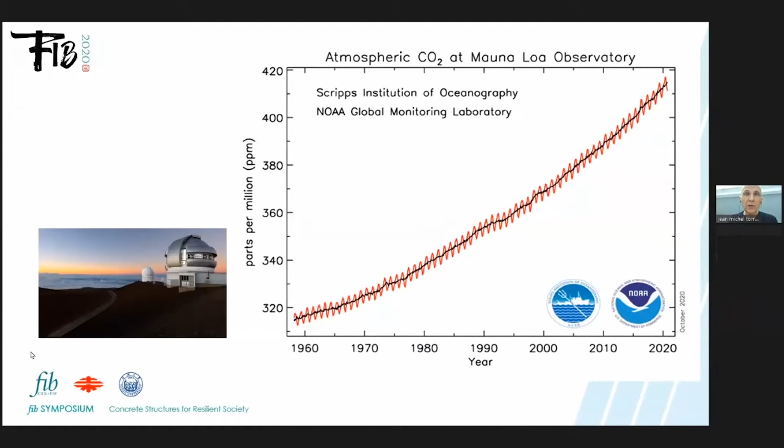And here I have the last measurement, and the effect of the COVID crisis is not visible on this curve, in fact. So it's an increase that will continue for several years. And the problem is that we have some effects on nature. Here I have chosen a first example, very important for the French people. It's the question of wine.

At the beginning of October this year in France and in Italy, there was the storm Alex. And for instance, in this little town in the Alps, there was more than 500 millimeters of rain in 24 hours. And it's a narrow valley, so that's why there was a lot of destruction in the valley. And the cost, we know, will be around 2 billion euros.

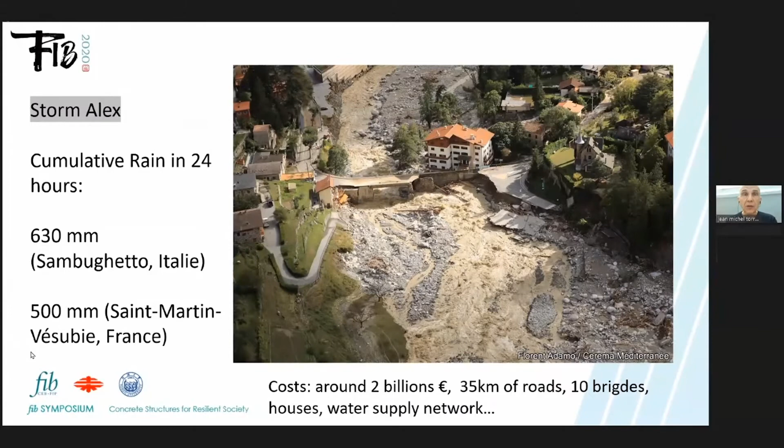A lot of roads were destroyed, bridges, houses, water supply network, etc. And of course, in France and in Italy, some people were killed also. Of course, it's not only in Europe. Actually, we have in Vietnam also large floods, with a lot of people dead and a lot of destruction also.

Here, this is a view in Hue, and you could see that we could not see the bridge. Normally, there is a bridge on the river, but it's under the water. And a new typhoon is coming actually in Vietnam. So we have a lot of accumulation, and we know that the increase in these events is due to climate change.

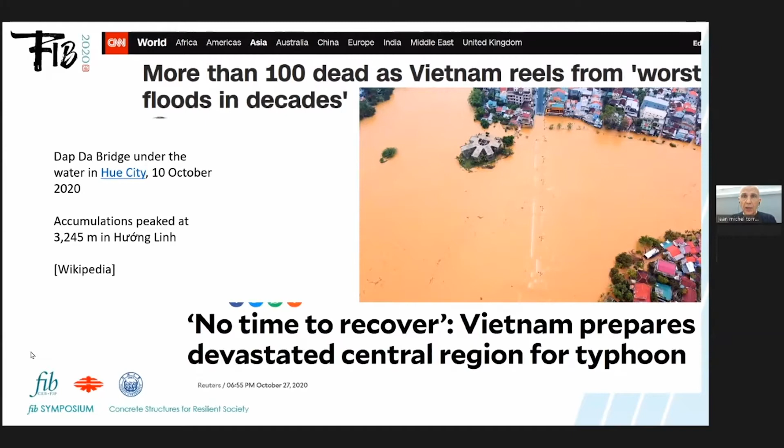On the other hand, we have urbanization that will continue. Actually, 1.5 million people join cities per week. And in the projection here, we still have an increase during the next 30 years. So we need to build, of course, houses, roads, water supply networks, etc., for these people coming into the cities.

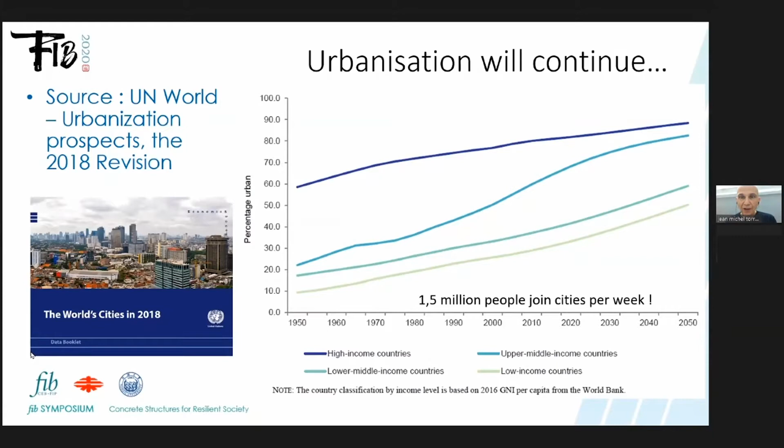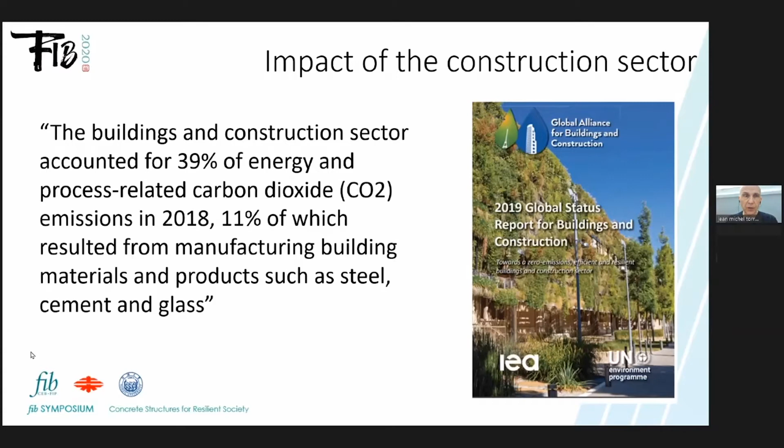So the impact of the construction sector is very important: it's around 40% of energy and carbon dioxide emissions, and around 11% of this comes from building materials: steel, cement, glass, mainly. So materials are an important part of these emissions. And in buildings, thanks to thermal regulation, the operational carbon you need to heat the house and heat the water, etc., is decreasing. But you could see that the embodied part is becoming larger.

This is a work published last year by Röck et al., and you could see that the operational carbon, in blue here, is decreasing with new buildings, and the embodied carbon from materials is increasing. If you look at the ratio between the pink and the blue part, we are close to 50% now. So the embodied part, related to the materials, is becoming larger, because we use more materials in order to reduce the operational carbon. So we have to work on these materials.

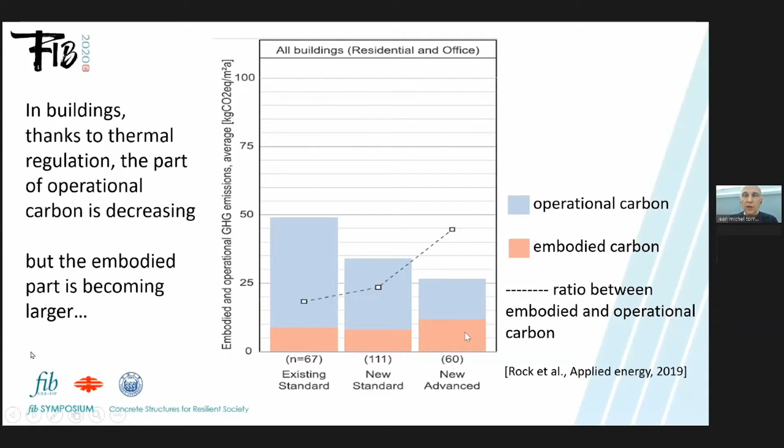I have good news. Your role matters. Firstly, in your personal life, there are several options to reduce your carbon footprint, but also when you work in the concrete industry. I have here this example of a very large building in the La Défense area of Paris.

If you assume a service life of 50 years and 600 kilograms of CO2 per square meter for the embodied carbon, the weight of this building is around 200,000 tons of CO2. If you save 1% of this, you save 2,000 tons of CO2, which is very large compared to what you could do in your personal life. And on the contrary, if you increase it by 1%, it's very important. So we have a role to play here in order to save CO2 in construction.

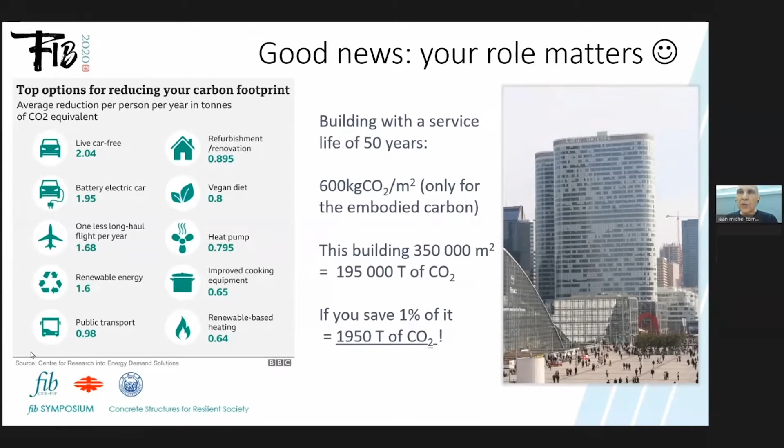Of course, all the materials are concerned, but if we look at concrete made with Portland cement, the cement represents 98% of the CO2 impact. It's the main part of the CO2 impact. And that's why cement represents between, let's say, 5 to 7%, depending on how you look at it, of total CO2 emissions. If the cement industry were a country, it would be the third largest CO2 emitter.

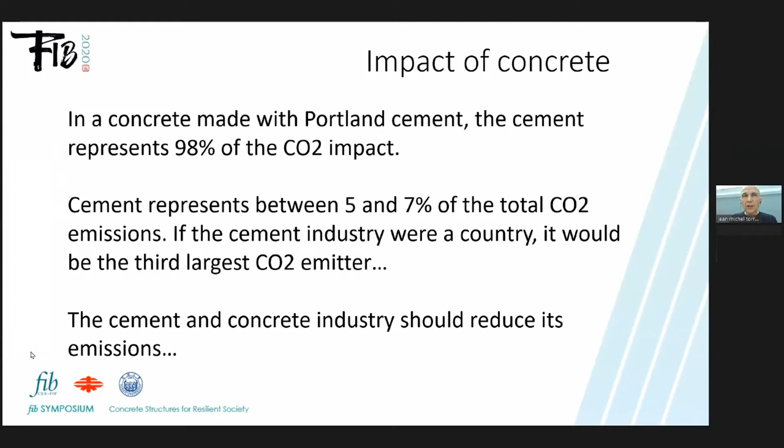Of course, it means that the cement and concrete industry should reduce its emissions. And it's mandatory, firstly, because of the climate urgency. We have discussed the effect on climate and the pressure of society, which will not accept that we are not doing something. But also, of course, because of the shareholders.

And that's why in October or so, in The Guardian, there was a paper about top asset owners that also want to cut big carbon emissions. They want to invest in companies that cut carbon emissions. So it's a very important point.

And in Europe we also have taxes for CO2. We have what we call the ETS, the emissions trading system. For the industries that are emitting CO2, we currently have free quotas. It means they are allowed to emit CO2, but the free quotas are decreasing. And we know that over the next 15 years these free quotas will disappear. It means that when you emit 1 ton of CO2, you have to pay for that.

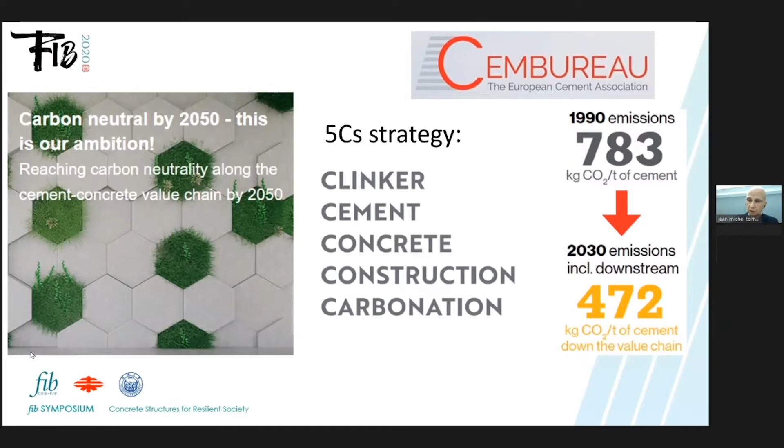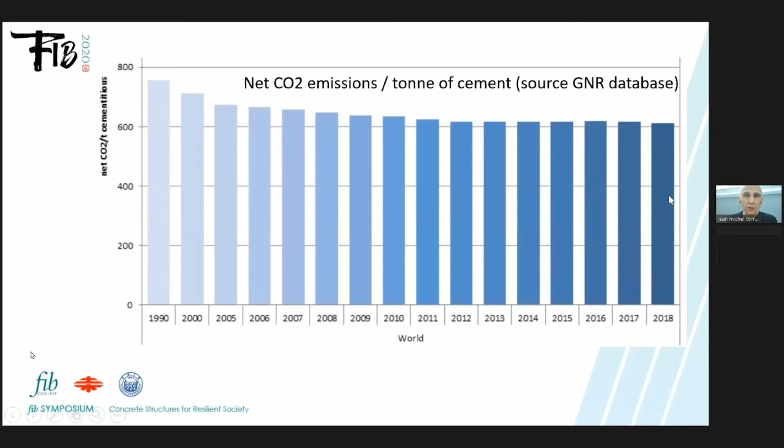Of course, they can work on the energy efficiency of the kiln in the cement factory. In France, they plan to use biomass waste to generate heat in the kiln, and the objective is to have 50% of the heat generated by biomass in 5 years. And more prospective research is on reducing the temperature in the kiln to obtain, for instance, belitic cements. And we can also have a post-treatment, which is energetically modified cement, to reduce the energy used in the kiln.

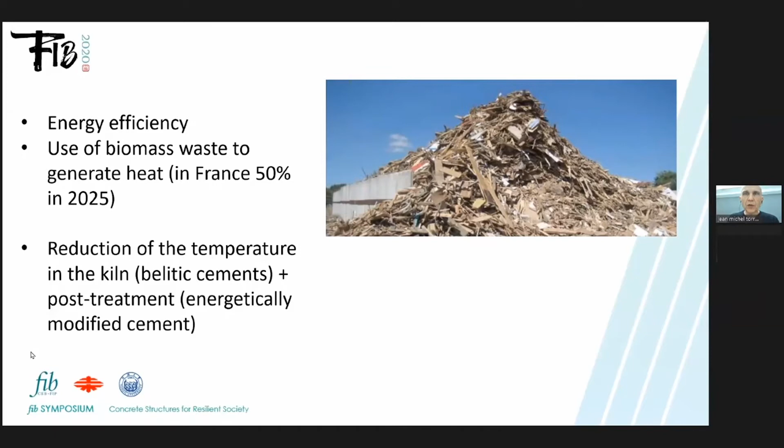Of course, we know that we can use additions, but additions have some limitations. Here I present the case of slag. Of course, we should use all the available blast furnace slag in concrete, but you can see that almost 100% of blast furnace slag is recovered, and almost 80% is already used in cement. So we can just, let's say, divert 21% from roads to concrete, but that's not a very large quantity.

And the second point is that we should have coherent environmental product declarations, because for concrete, slag is a waste.

It means that the emissions are close to zero. And for steel, it's a co-product, and in fact, in the CO2 emission of steel, they deduce 900 kilograms of CO2 per ton of slag, which is used in cement, and that is the main part of the slag. And it means that if you add concrete and steel, something is missing, because in concrete we consider slag is zero emission, and in steel they consider it's a negative emission.

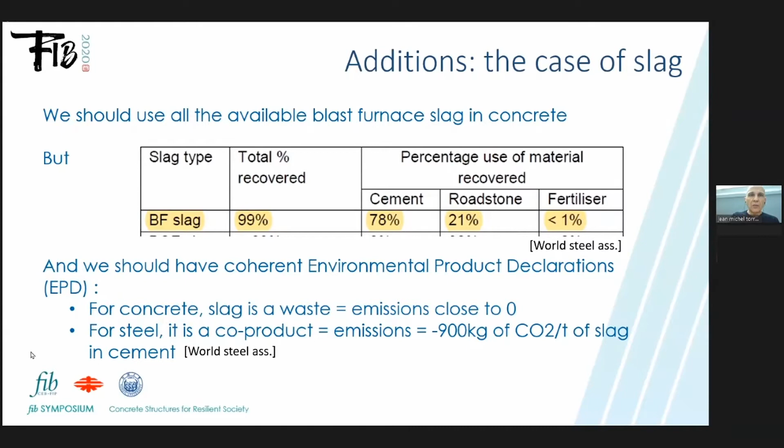We have new cement types in Europe. We will have CEM II/C, meaning that we have only 50% of clinker, and another component, mainly limestone, for instance. We expect to have a CEM VI cement, ternary cement, with less than 50% of clinker, and with blast furnace slag and fly ash or limestone. Of course, there is a lot of research on LC3, limestone calcined clay cement. I think this is very important because of the availability of limestone and clay on Earth.

And we know that the other additions like slag, I already have discussed this point, but fly ash, for instance, also, if we want to diminish CO2 emissions, we will have to limit the use of coal for production of energy. So we need other additions, and we have a lot of clay on Earth, so that's a very interesting possibility. And of course, there are also alternative cements, alkali activated materials, using locally available raw materials. You could see, for instance, John Provis papers on this subject.

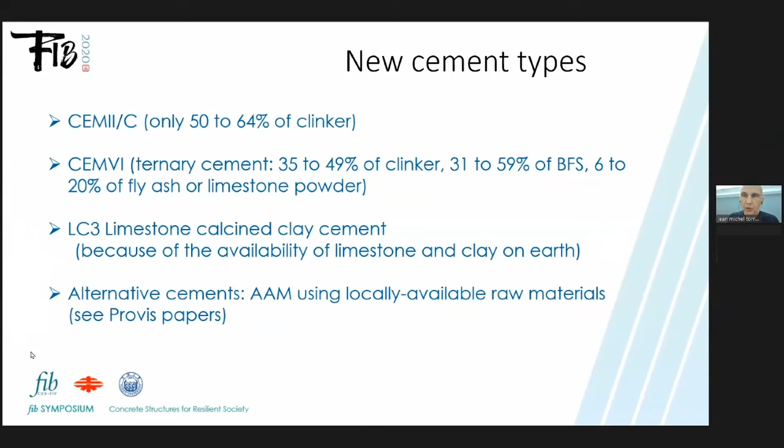That was for cement. On concrete, firstly, we have to optimize the mix design with the granular stacking in particular, and the use of admixtures to reduce the quantity of paste for a given workability. And also something which is less discussed, we have to reduce margins, the overdosages. Here you have the dosage in the production of concrete for a precast plant, and you could see the required dosage was here. And in fact, they prepare concrete with a larger amount of cement, from, let's say, 0 to 20 kilograms of cement per cubic meter more than was required.

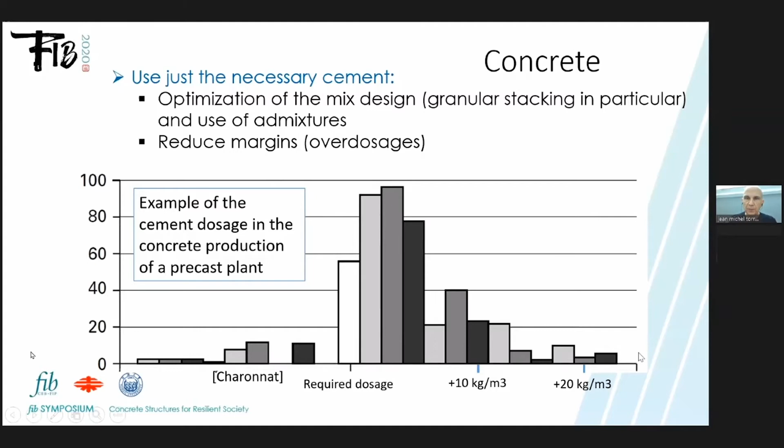So it's a way, of course, in the precast plant to be on the safe side, but if you are on the safe side, you are overdosing, in fact. Of course, we want to use just the necessary cement, so to prescribe the right concrete for an exposure class. And also we can improve the performance-based approach rather than a prescriptive approach. For instance, in Europe, if you are near the sea, you have a requirement of 350 kilograms of binder per cubic meter, and maybe you don't need that. And of course, you need also trained workers that are aware of the problem of CO2.

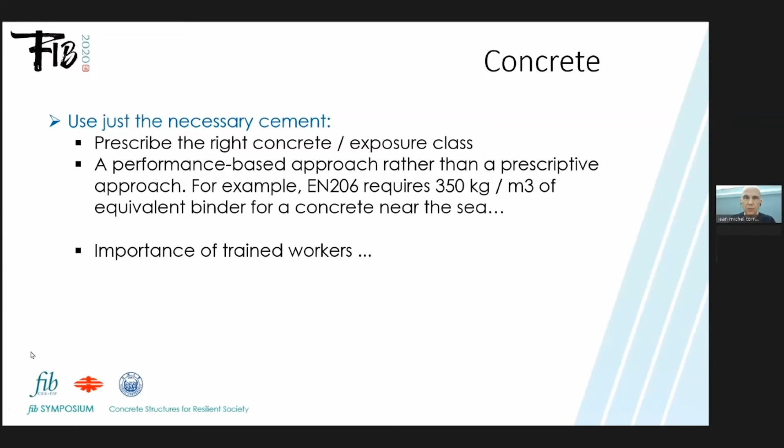In construction, again, do not over-design. Take into account the environmental aspect in the design, the eco-constructions, and codes like, of course, Eurocode 2 or the Model Code must ensure the mechanical safety, the durability, and the sustainability, which is now well visible in the new fib policy. And again, the importance of the training of design office engineers, because they have to be aware that they can play a role to reduce the CO2 emissions in what they build.

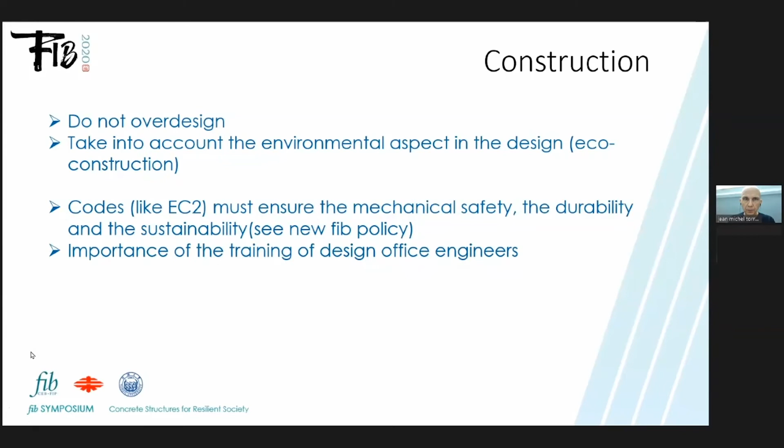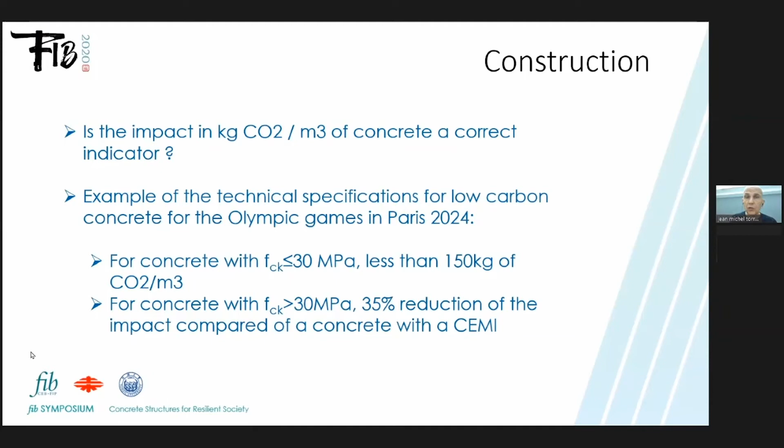We have to look at the indicator. What is a correct indicator for concrete? For the impact it is kilograms of CO2 per cubic meter. For instance, in France, we have an example of the technical specification for low carbon concrete for the buildings of the Olympic Games in Paris. They asked, when the strength was lower than 30 megapascals, to have less than 150 kilograms of CO2 per cubic meter, and when the strength was larger than 30 megapascals, to have a 35% reduction of the impact compared to a concrete with a CEM I.

150: here I placed several mix designs and I have evaluated the CO2 impact. You see it's very low and only some of the concretes are able to obtain this result. So it's not easy to obtain this level. And also there are, of course, some problems due to the evolution of the strength in time. And so there is an impact on the way you build what you want to build.

And also, it's not obvious that having the lower CO2 emission per cubic meter is the best solution. Of course, if I go back here, you see that the trend is when you increase the strength, you have an increase of the CO2 per cubic meter. Of course, if you consider a given strength, you could have very large differences, but nevertheless, there is a trend.

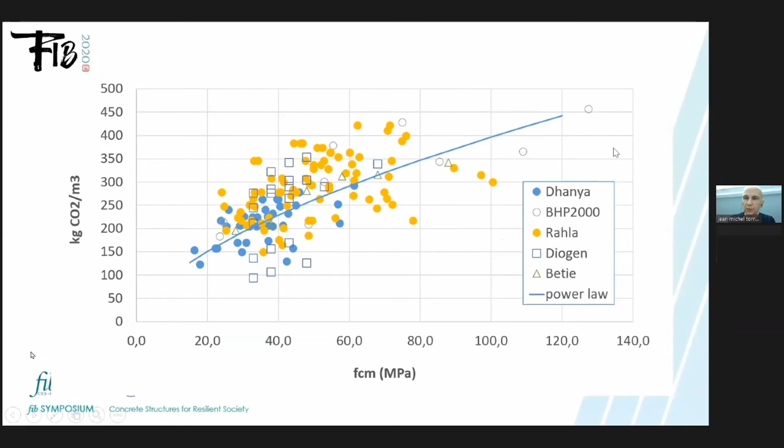So if you have the design of a column, it was a study made by a student at École des Ponts, E.H. Nani, for this building, which is also in La Défense, and he has considered a column at the bottom of the building. And he has shown in his work that considering CO2, it's better to have the minimal reinforcement. And with one type of cement it is better to have the largest strength.

For instance, if the concrete uses CEM I cement, you could see that when you increase the strength, you have a lower amount of CO2 for a given column. And it's the same with CEM II. Of course, with CEM III, considering slag with no impact, you have a lower value. And we are not able to obtain very easily high strength concrete with slag. Of course, I know it's possible, but it was not considered here in the study.

So in fact, for instance, if you use CEM I or CEM II, it's better to have a higher strength concrete. It means that it's better to have a concrete which has a larger CO2 per cubic meter, and you have to consider the column, or you have to consider the building. And also the design of the building was not optimized in order to minimize the impact. It was done for a classical concrete. So we have also to think about the design and improve the design.

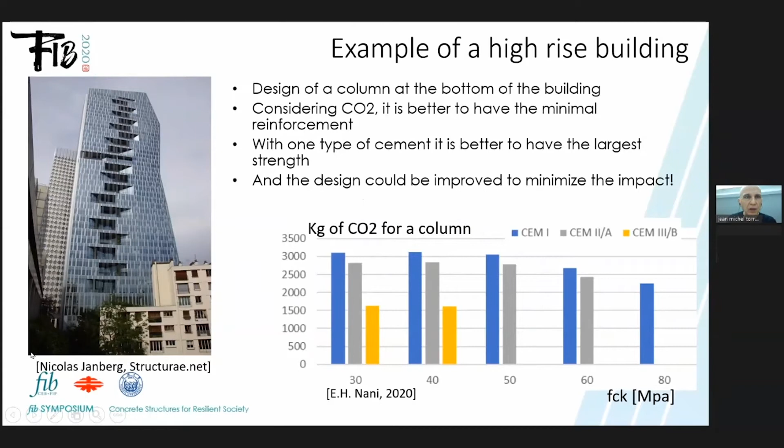Recycling also is a possibility. Here it's an example of a site where we are involved near Paris. It was an engineering school, and it was destroyed, and all the concrete was recycled on site. And in this case, of course, it's very interesting because you avoid transportation of the demolished concrete, you avoid transportation of natural aggregates, etc.

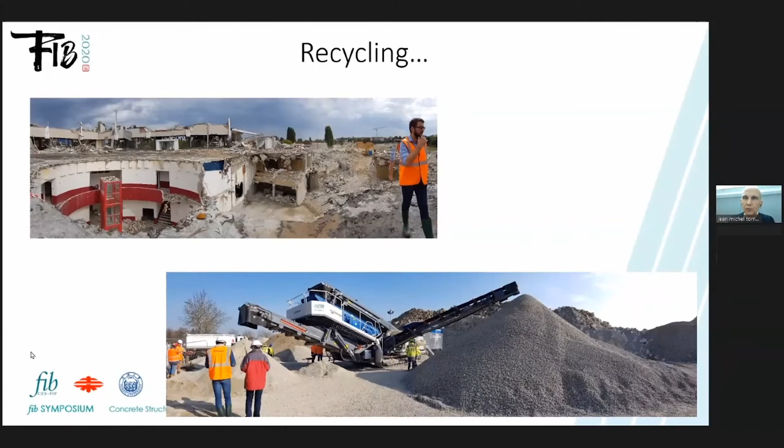But we know also that if we don't have a high quality recycled aggregate, we have to increase the cement content. Here it's a study of Amor Ben Fraj and Mrs. Idir from Cerema, and they have compensated the use of a larger amount of recycled aggregates, which are low quality recycled aggregates. It means there are a lot of wood, plastics, bituminous materials, not only concrete aggregate.

And you see that you have to increase the cement content to obtain a given strength when you have 100% of aggregate, of course a lower amount if you have 50%. But even if you have only 20% of recycled aggregates, you have to increase slightly the amount of cement. Of course, it's different when you have better aggregates. So the curve here corresponds to the concrete with the low quality aggregates. This curve here in black corresponds to high quality aggregates.

And here you have the CO2 impact of 1 cubic meter of concrete with a natural aggregate transported 22 kilometers, and here transported 250 kilometers. And this line is going from this level to the other one with the impact of transportation. So in red, it's for natural aggregates, and the black lines are for recycled aggregates. And you see, of course, that there is a big influence of the distance, and that if the natural aggregates are coming from more than 50 kilometers, it's better to use recycled aggregates in this case.

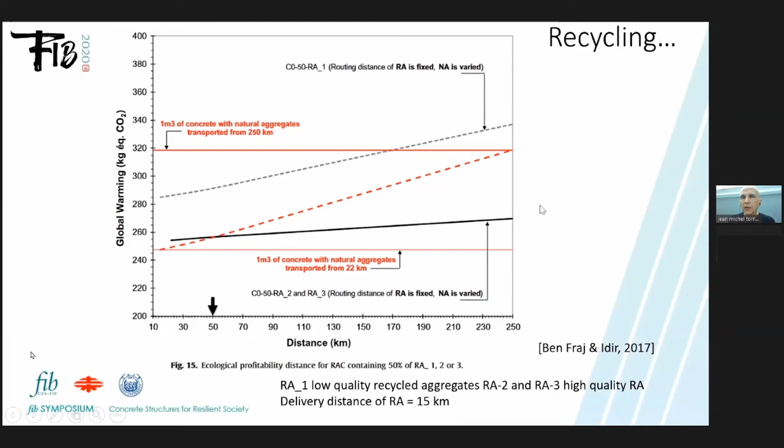So the conclusion, of course, is in the case of good quality aggregate. So there are two conclusions. The first one is that the sorting of recycled aggregates is, of course, very important. You have to eliminate all the other materials from your concrete recycled aggregates, and in this case, it's better. And the second point is the importance of the transportation. Of course, if, like in this case, the recycled aggregates are already on site, it is interesting to use recycled aggregate. If you have a lot of transportation, of course, it will be discussed.

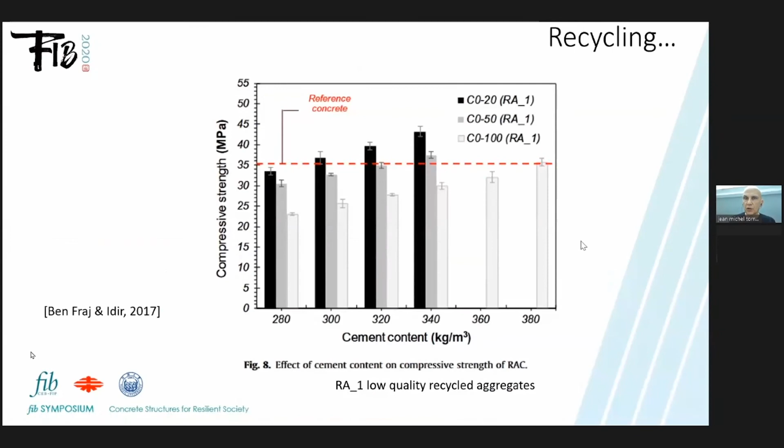We have also to think about reuse and design for disassembly, because, of course, when you are doing recycling, you have to demolish, to crush the concrete. And finally, you have to add again cement to obtain again concrete.

And maybe we can think, okay, I have this structure. I can, let's say, dismantle here, and we can keep the beam and use it again. But of course, in this case, you have to imagine the reinforcement in order to be able to remove these parts and to keep the beam intact.

Of course, this is very connected to BIM for the storage and traceability of the data concerning the reused elements, and also for the conception with reuse of concrete elements. So I think there is some research actually in France and in the world about this, because of course it would certainly be better to reuse elements directly than to crush all the concrete and to recycle concrete aggregates.

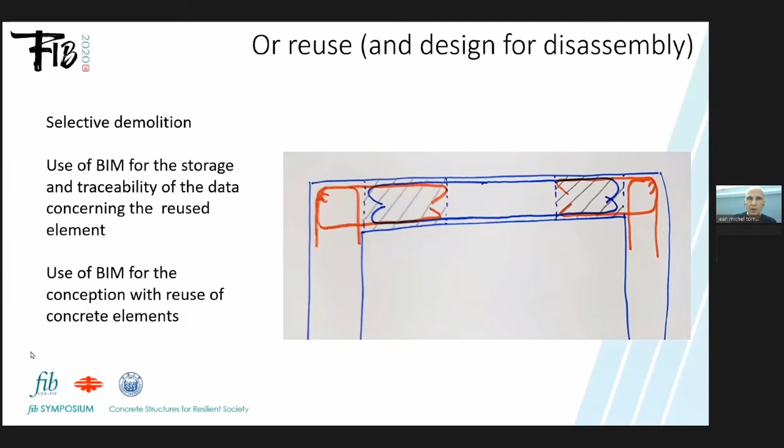If we look at the CO2 impact of cement, it's mandatory, in fact, to use carbon capture at the kiln, because all the solutions I have presented will not be enough to obtain net zero emissions. And actually the evaluation is that we need to capture around 60% of the CO2 from the cement factories. And we have some examples of this technology.

We have the Longship project in Norway, where they plan to capture CO2 in a cement factory and also in a waste factory. And they will transport the liquefied CO2 to the North Sea to store it in a depleted oil well. And in Colorado, I have seen also that there will be a project to capture carbon dioxide on a commercial scale.

There are also projects to burn oxygen at the cement factories. And the only interest in burning oxygen instead of air is to obtain pure CO2 at the kiln. And the big problem here is the cost of CCS, because it will be very large. It will be a very large cost.

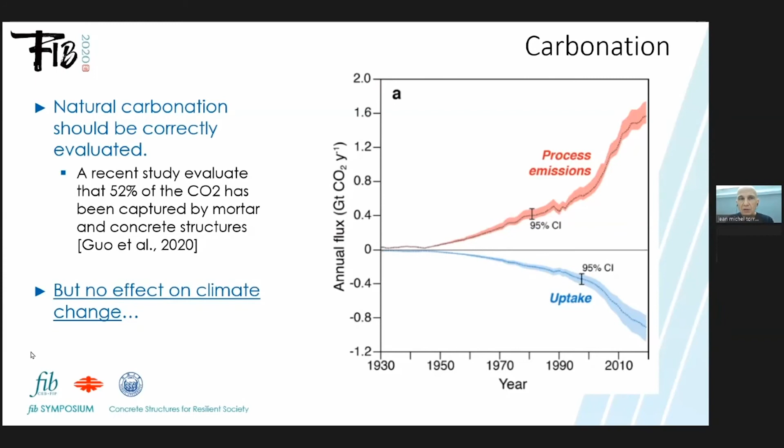We are also working in France on accelerated carbonation in the project that is called FastCarb. We use recycled concrete aggregates. So we plan to have preservation of natural resources on natural aggregates, the improvement of these recycled concrete aggregates by carbonation, and also to store CO2 in the recycled concrete aggregates.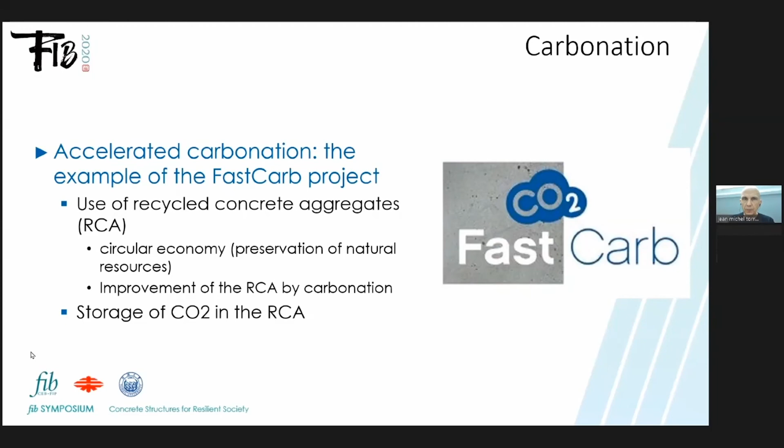We have a PhD that will be finished this year, and Marie has studied a lot of parameters: CO2 concentration, the size of the aggregate, the water content, temperature, the natural carbonation. And here you see the effect of water content; like in natural carbonation, there is an optimum for the water content. And also here you see the effect of natural carbonation.

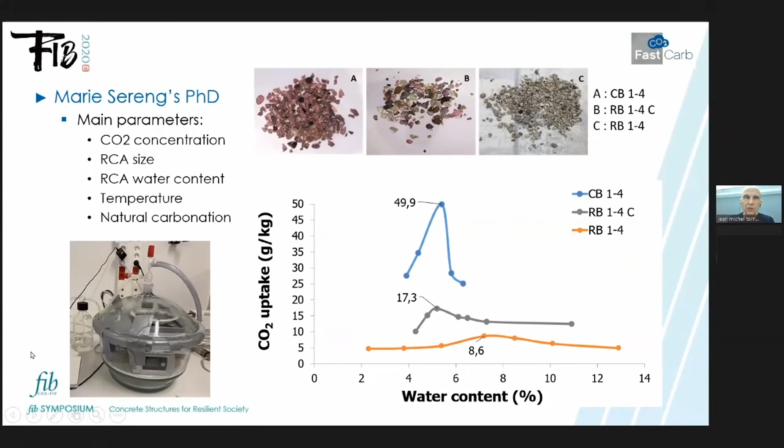For instance, we sprayed phenolphthalein on the aggregates. You could see that here they are not carbonated, while here they are already carbonated. And there is, of course, a big difference because this one is this here, and this one is this here. So you see, of course, the importance of the natural carbonation on the uptake we can obtain by accelerated carbonation.

A very interesting thing is that we obtain a decrease of the water absorption coefficient, and this high water absorption coefficient is why we need more cement when we use recycled concrete aggregate. So we can expect to save a part of the cement increase with our carbonated recycled concrete aggregates.

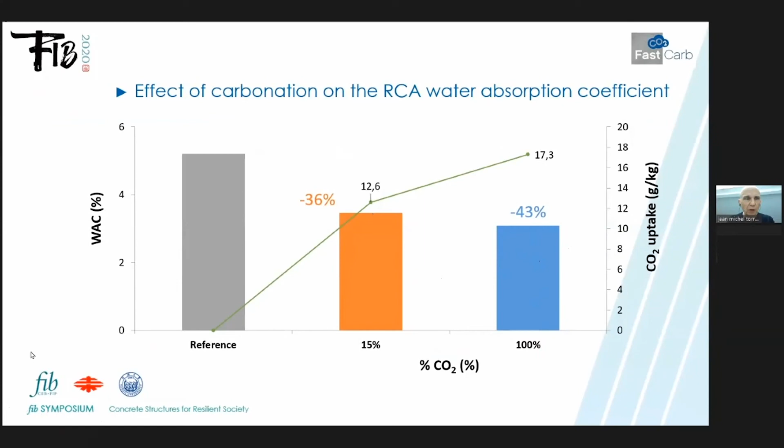We have actually two devices near cement factories. Here in a cement factory owned by Vicat, and this one by LafargeHolcim, and they will produce 50 tons of carbonated aggregates to prepare concrete and to verify the mechanical and durability performances. And we are also looking at the life cycle analysis and an economical evaluation of the process in the framework of this project.

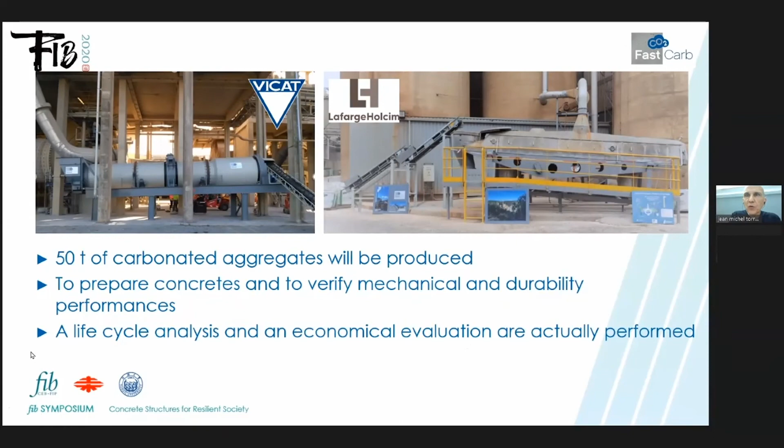I think it's time to conclude now. I hope you are convinced that climate change is real and that human activities are the main cause for this climate change. We need to reduce the CO2 emissions. For instance, the European Union aims to be climate neutral by 2050. I've seen China is the same, Japan is the same. We expect to have an economy with net zero greenhouse gas emissions.

And the concrete construction sector and concrete industry should contribute to these objectives. It means that all the stakeholders, including FIB, of course, should be involved, not only the cement company. And also we need to add all the possible ways to reach this goal, because there is not a unique solution that will solve everything.